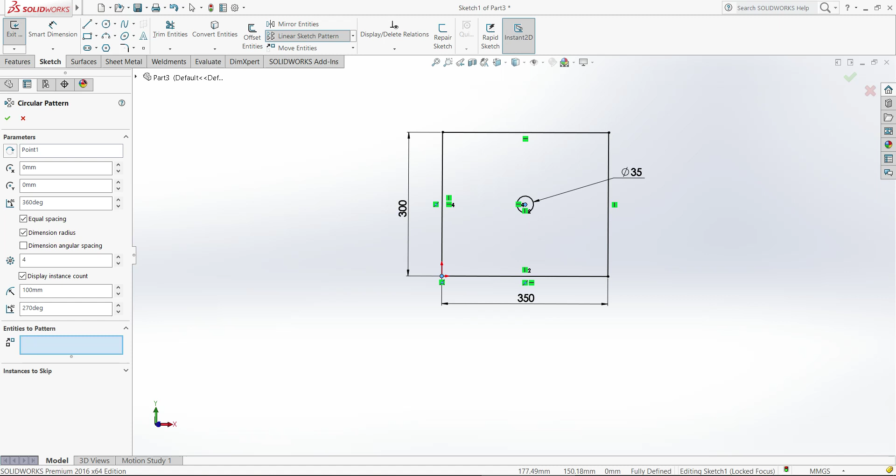So let's move on to the sketch pattern we are doing. Here I am doing a circular sketch pattern. First I select the center point, then this circle. So you get this has a center point, it is making 4 circles as pattern.

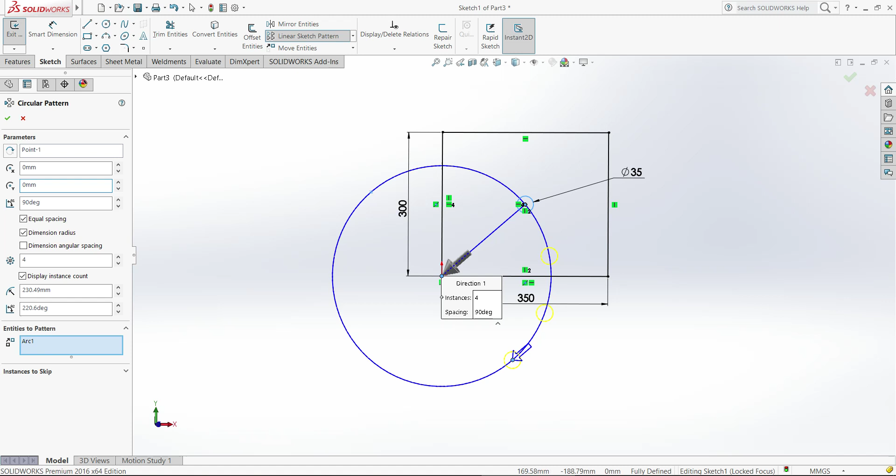Here we want the total degree 360. I am changing this to 90. So you can see it is making like this. In this 90 degree it is making 4 circles. If I click OK, it will come. So this is how you can make the circular pattern.

Now I can edit the sketch. I don't want these two circles outside because I cannot make the extrusion. So I delete them. Now I make the extrusion.

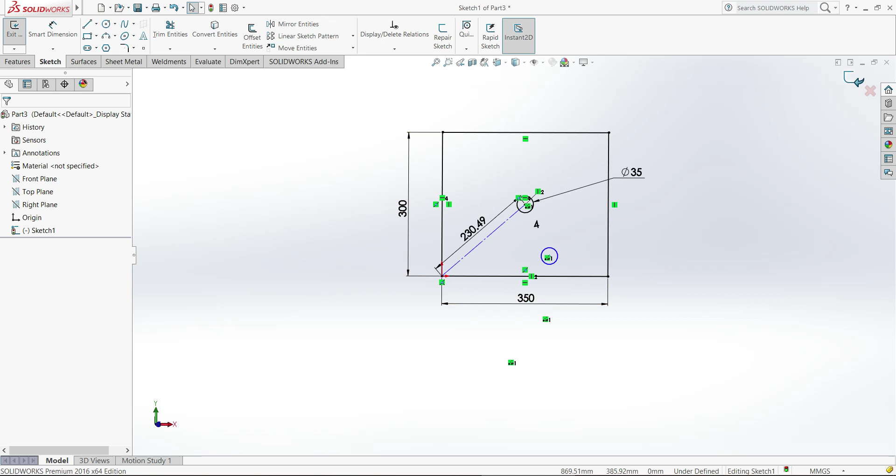Extrude both. I click the sketch, but not like this. So it will make. So we are getting the sketch with 60 depth.

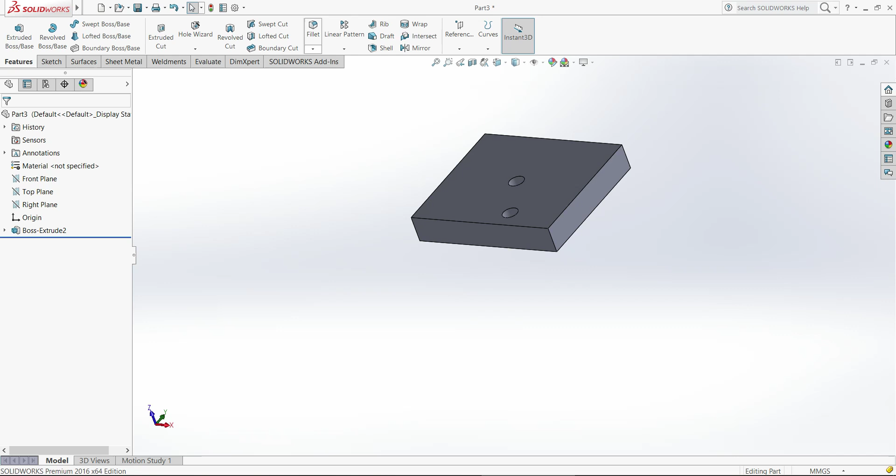Now make the fillet. This is a feature. In feature there is fillet and chamfer as in sketch. So you can make it fillet here, here, and you can make the preview, full preview or partial. So I'm creating here 20. So it is creating a 20 mm radius fillet.

Now here again I am making chamfer. This is in feature chamfer. This also 30. Chamfer is created.

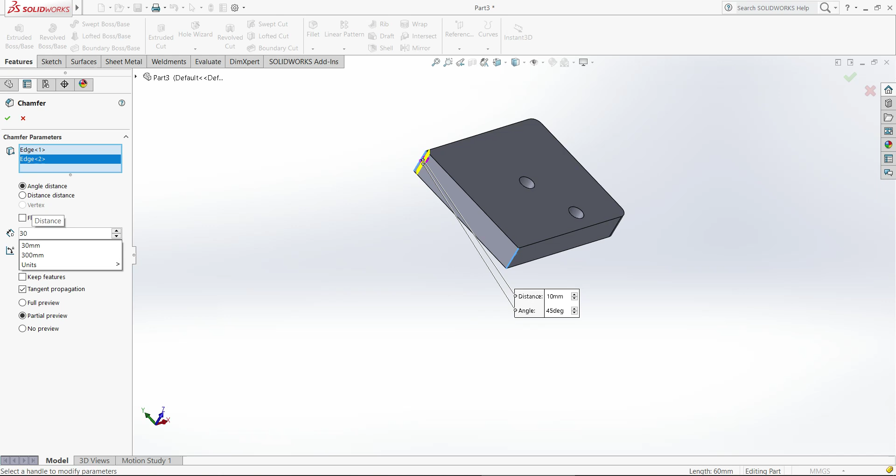So now what I want to cut, one portion of the piece. I'm cutting here. Here I'm cutting one portion. So I create sketch above the face.

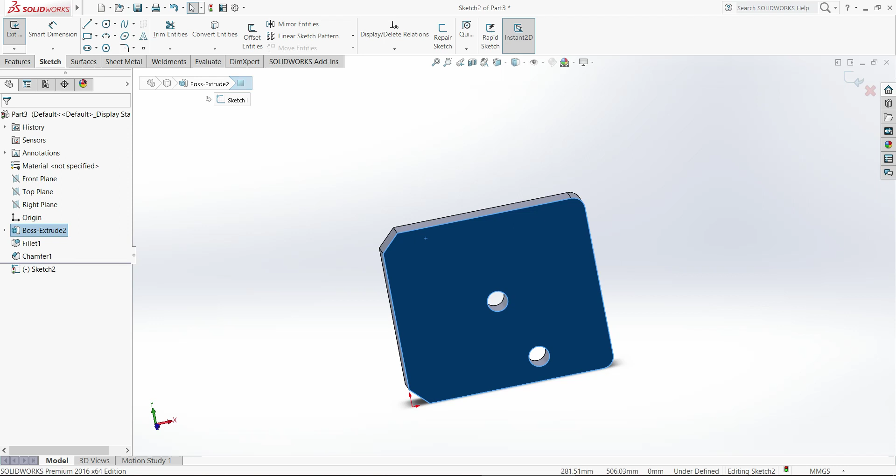First select the face, then click on sketch. Now if it is not moving, then you can move it by yourself. Here click here the rectangle.

Now give dimension 120, and this side make it 100. Now make sure the center point here and the center point here are horizontally coincident. Now click extrude cut.

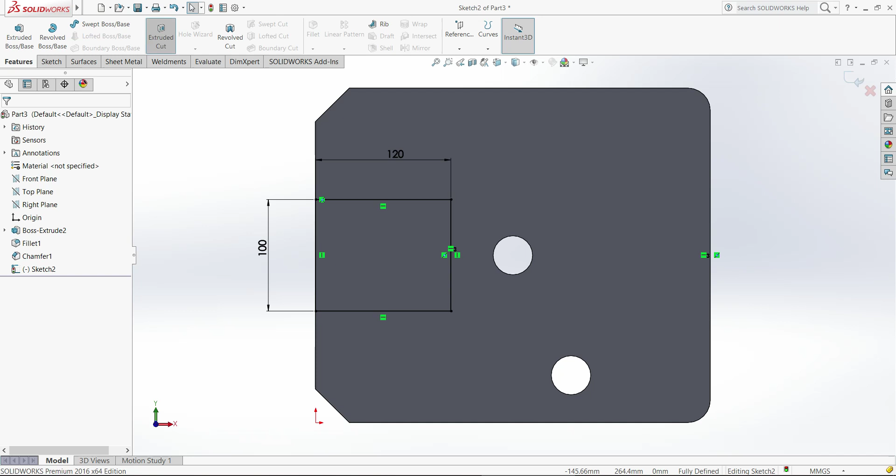It will cut the material.